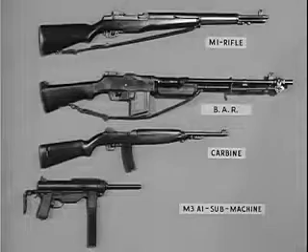The M14 rifle will, in time, replace these four weapons. The adoption of the M14, one basic weapon, greatly reduces logistical problems. Moreover, it reduces time for training the user and small arms maintenance personnel.

The new weapon has a 20-round magazine which is quickly and easily replaced. Before removing an empty magazine, the safety is placed on safe. The empty magazine is removed and a loaded magazine is snapped into place so that it is engaged by the rear of the operating rod spring guide and the magazine latch. Now allow the operating rod spring to force the operating rod forward, carrying the bolt with it, to chamber the first round and lock the bolt. The rifle is now cocked and ready to fire when the safety is off.

The magazine also can be replenished from the top with clips of 5 rounds each without removing the magazine from the weapon.

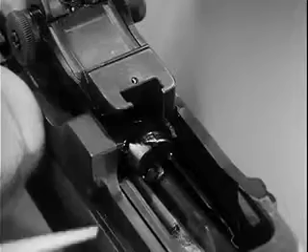To speed up the loading operation for continued firing, the bolt is held to the rear automatically for reloading after the last round in the magazine is fired. This is accomplished by the upward pressure of the magazine follower, forcing the bolt lock into position in front of the bolt. This holds the bolt to the rear while the change of magazine takes place.

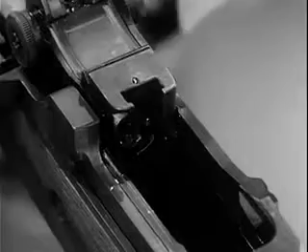By pulling slightly to the rear on the operating rod, the rifleman allows the bolt lock spring to expand, pivoting the bolt lock out from in front of the bolt. This also releases the operating rod. As the operating rod is released, it is driven forward by the expanding operating rod spring, taking the bolt with it. The bolt strips the first round from the magazine for chambering.

Another feature of the M14 is its flash suppressor. Slots in the suppressor act to break up the escaping gases, thus reducing the flash. The suppressor also acts as a muzzle brake, minimizing recoil and giving maximum stability during firing.

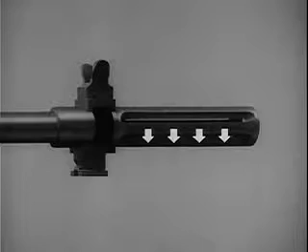This is the way the flash suppressor works. Gas strikes the wide bottom rib of the flash suppressor and exerts downward pressure to keep the rifle stable during firing. Of course, gas escapes in all other directions too.

When the propellant gas hits the front of the slots, it tends to pull the weapon forward, reducing recoil.

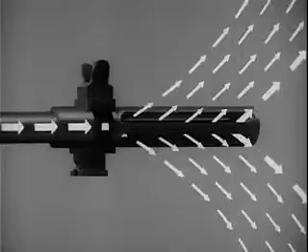By disassembling or field stripping the weapon, you will become familiar with the parts. To field strip it, first clear the weapon. That is, remove the magazine and check to see there is no round in the chamber.

Put the safety in the safe position. Turn the rifle upside down with the muzzle pointing to your left. To remove the firing mechanism, grasp the rear of the trigger guard and pull to your right and pry upward.

Then swing up the trigger guard and lift out the firing mechanism. Separate the stock from the receiver by placing your left hand on the gas cylinder and lifting upward on the butt of the stock.

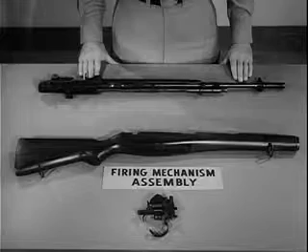The rifle is now field stripped into its three basic groups: the firing mechanism assembly, the stock group, and the barrel and receiver group.

To further disassemble the weapon into individual parts, turn the barrel and receiver group on its side with the connector assembly up.

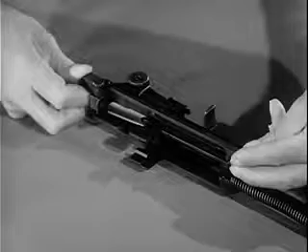To release the connector assembly, press forward on it with the right thumb until the forward end can be lifted off the connector lock. Rotate the connector assembly clockwise until the slot at the rear end is aligned with the elongated stud on the sear release.

Then slightly lower the front end of the connector and lift it from the sear release.

To remove the operating rod spring and spring guide, pull forward on the operating rod spring, relieving pressure on the connector lock. Pull the lock outward, then remove the operating rod spring and spring guide.

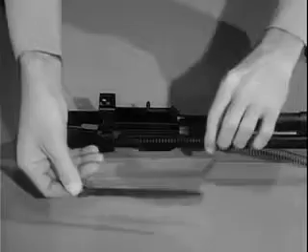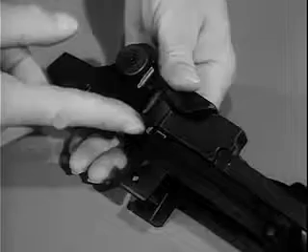Now turn the barrel and receiver group so the sights are down. Retract the operating rod until the guide lug on its lower surface aligns with the disassembly notch on the receiver. Lift the operating rod out and to the rear, disengaging it from the operating rod guide.

To remove the bolt group, grasp it by the roller, and while sliding it forward, lift it upward and outward to the right front with a slight rotating motion.

The barrel and receiver group is now field stripped into the connector assembly, the operating rod spring and guide, the operating rod, and the bolt. These basic groups may be further disassembled if required.

The rifle is assembled by reversing the procedure. After reassembly, the rifle should be hand-operated without ammunition to check for freedom of action of the components.

The M14 is gas-operated. That is, some of the gas formed by the firing of the cartridge is bled to the gas cylinder.

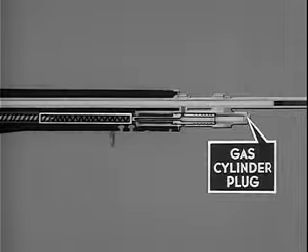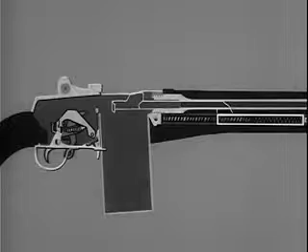In the gas cylinder, the gas inside the piston expands. The piston drives the operating rod to the rear, compressing the operating rod spring. Then the compressed operating rod spring expands, driving the operating rod to its forward position.

This combination of backward and forward movements initiated by the firing of each cartridge performs a series of steps known as the cycle of functioning. The cycle of functioning can be broken down into 8 steps. Of course, these are performed as integrated and overlapping actions.

The first step is feeding, which is positioning the cartridge ready for chambering. The second step is chambering, seating the round in the chamber. Third step is locking the bolt to the barrel, thus holding the cartridge seated in the chamber so that gas pressure will be maintained in the barrel to propel the bullet. The fourth step is firing, ignition of the primer of the cartridge in the chamber.

Step 5 is unlocking the bolt from the barrel. Step 6 is extraction of the empty cartridge case from the chamber. In step 7, the empty cartridge case is ejected from the weapon. And step 8 is cocking in preparation for the firing of the next round.

These 8 steps happen one after another, and so rapidly as to be almost simultaneous. By using a schematic drawing, we will see how these 8 steps are performed.

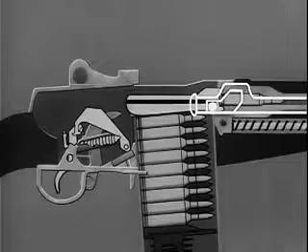The bolt is locked. The rifle is now cocked and ready to be fired when the safety is off. By pressing the trigger, the hammer is released, firing the cartridge.

Part of the propelling gas escapes to the gas cylinder. The expanding gas in the gas cylinder drives the piston and operating rod to the rear and the bolt with it. On this rear movement, the bolt is unlocked.

The spent cartridge is extracted from the chamber and ejected from the rifle. At the same time, the hammer is again cocked and the cycle ready to start over.

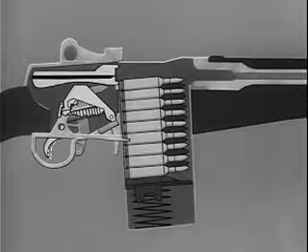Now, let us see in greater detail how the 8 functions or steps are performed.

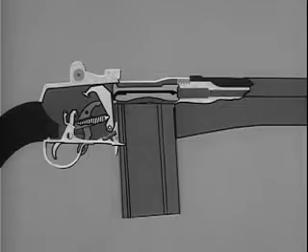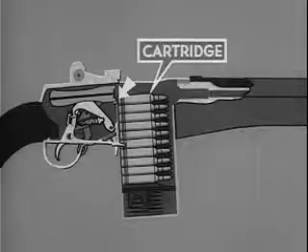When we move the bolt to the rear, by hand initially, the bolt clears the top cartridge in the magazine. The magazine spring, exerting pressure against the follower, forces the top cartridge up in front of the bolt in position for chambering. Let us look at it again.

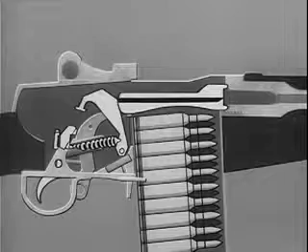When the bolt is moved to the rear, the bolt rotates. Rotation of the bolt during unlocking cams the hammer slightly rearward. It also moves the firing pin rearward as the firing pin tang contacts the camming surface on the bridge of the receiver.

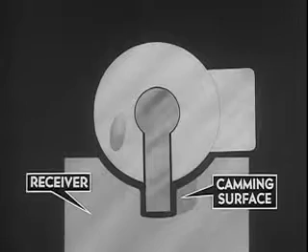As the bolt continues to the rear, the feed rib on the bottom of the bolt forces the hammer to the rear and down, pivoting the hammer on the hammer pin. The bolt continues rearward, riding over the hammer.

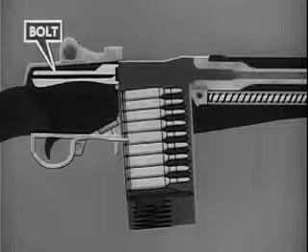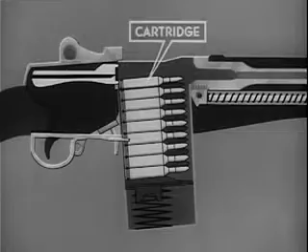The bolt is now driven forward by the expansion of the compressed operating rod spring. The bolt strips the topmost cartridge from the magazine. The cartridge is deflected upward by the feed ramp in the lower rear of the chamber and forced into the chamber.

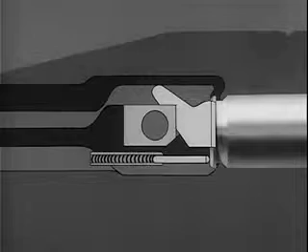Also, on the forward movement of the bolt, the extractor on the bolt face is forced outward by the rim of the cartridge. When the face of the bolt comes against the head of the cartridge, the extractor spring expands, and the lip of the extractor engages the extracting groove of the cartridge.

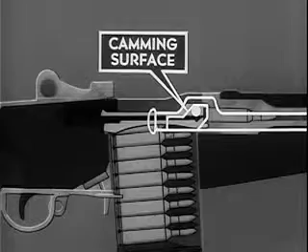Finally, the bolt is locked. Locking of the bolt is accomplished by the rear of the camming surface in the hump of the operating rod. The camming surface contacts the anti-friction roller on the locking lug and rotates the bolt clockwise. By the clockwise rotation, the locking lugs on the bolt are forced into the locking recess of the receiver. Meanwhile, the firing pin tang is aligned with the notch in the bridge of the receiver.

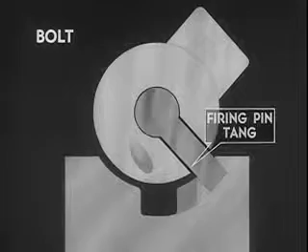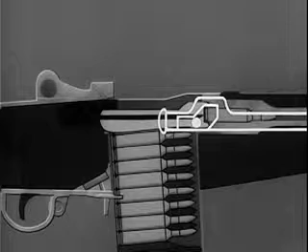The operating rod continues its forward movement for 3/8 of an inch. During chambering and locking, the operating rod is repositioning the gas piston.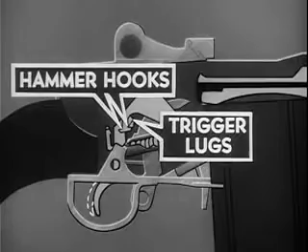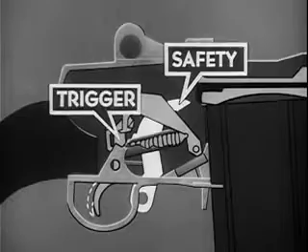With the first round chambered and locked, the next step is firing. Firing, of course, is initiated in the firing mechanism assembly. The firing mechanism assembly consists of the hammer, the hammer spring, which drives the hammer and which is compressed when the hammer is cocked, the hammer hooks, which are held by the trigger lugs, the safety, which engages the hammer and blocks movement of the trigger when in the rear safe position, and the sear.

The movement of the bolt to the rear forced the rear hammer hooks into engagement with the sear, which prevents the hammer from following the bolt forward. When the trigger is released, the front hammer hook will be engaged by the trigger lugs as soon as the sear releases the rear hammer hooks. When the trigger is squeezed, the trigger lugs release the hammer hooks so that the hammer spring can drive the hammer forward.

The hammer strikes the tang of the firing pin and moves it forward. The firing pin strikes the primer on the base of the cartridge, igniting the powder.

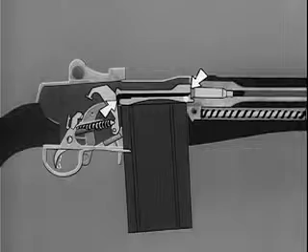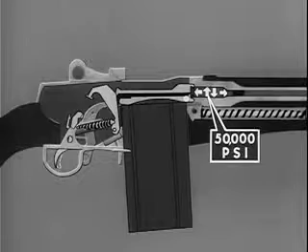When the cartridge is fired in the chamber, gas pressures build up, and a gas pressure of 50,000 pounds per square inch is exerted in every direction. It cannot escape to the rear because the locked bolt holds the case in the chamber, and the brass case is expanded against the chamber walls, effectively sealing the chamber. The gas can only escape by propelling the bullet out through the muzzle of the rifle.

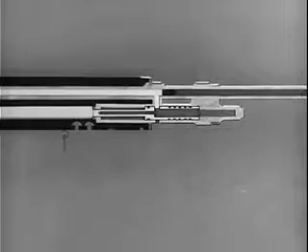Near the muzzle is the gas port in the barrel, and as the bullet clears the gas port, part of the gas is bled off, entering the gas cylinder and piston. As gas enters the piston, it expands into the gas cylinder plug.

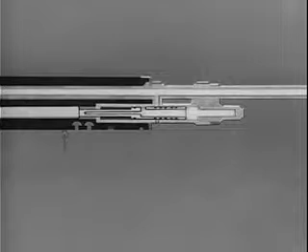Continued expansion of gas builds up a pressure which forces the gas piston to the rear. The initial rearward movement of the piston shuts off the barrel gas port. The pressure exerted against the piston drives it to the rear 1 1/2 inches.

As the piston clears the lower gas port in the gas cylinder, the gas pressure instantly vents to the open air, removing all driving force from the piston.

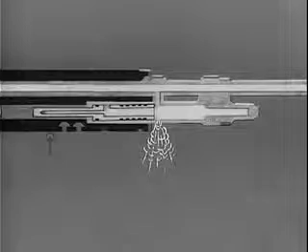During the 1 1/2 inch movement of the piston rearward, the piston is forcing the operating rod to the rear. After completion of piston travel, the force of inertia causes the operating rod to continue to the rear until the termination of recoil. Recoil ends when the shoulder of the operating rod contacts the front end of the receiver.

The operating rod spring now expands and forces the operating rod forward in preparation for firing of the next round. In the forward movement, the front end of the operating rod repositions the gas piston, which comes to rest against the gas cylinder plug. To see how unlocking was accomplished, we will repeat the action.

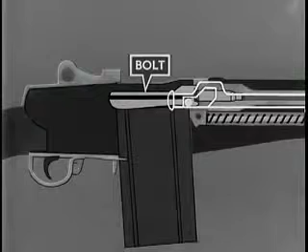When the operating rod moved rearward, it accomplished several things, the first of which was the unlocking of the bolt. Before the bolt starts to unlock, the operating rod permits 3/8 of an inch of free travel to the rear. This is a safety factor, permitting the bullet to leave the muzzle and gas pressure to subside before unlocking begins. This prevents gas from blowing back into the rifleman's face when the bolt unlocks.

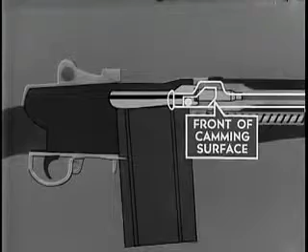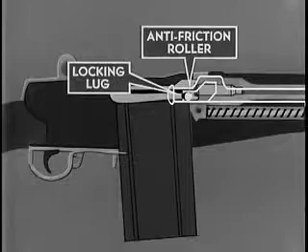At the completion of free travel, the front of the camming surface in the hump of the operating rod comes in contact with the anti-friction roller on the right locking lug. This rotates the bolt counterclockwise, forcing the locking lug on the bolt out of the locking recess in the receiver and unlocking the bolt.

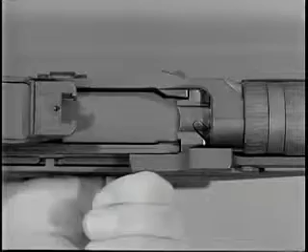While the bolt is being unlocked, slow initial extraction takes place. The rim of the cartridge case is gripped firmly by the extractor. A slow twisting pull called slow initial extraction is imparted by the rotating bolt.

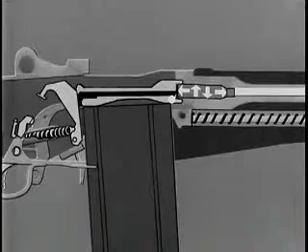Remember that at the moment the cartridge was fired, gas pressure of 50,000 pounds per square inch expanded the brass cartridge case tight against the chamber walls. It also forced the head of the cartridge case against the face of the bolt.

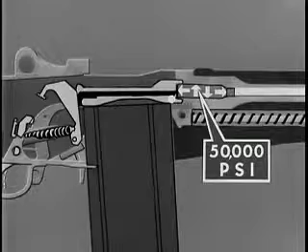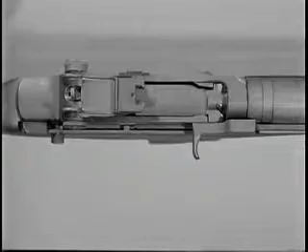To pry the cartridge loose, the slow twisting pull is required. It begins just before unlocking is completed. The corresponding radii of the locking lugs on the bolt and the locking recesses of the receiver, along with the rotation of the bolt, allow a slight rearward movement of the bolt. This rearward twisting action loosens the case in the chamber and causes slow initial extraction. When the bolt continues to the rear, following unlocking and extraction, the spent cartridge is ejected.

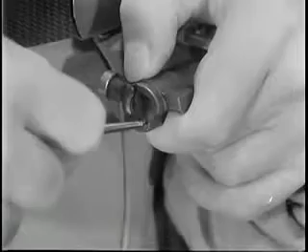This is the ejector in the face of the bolt. The ejector spring is compressed when the ejector is held flush against the face of the bolt. When a round is in the chamber and the bolt is locked, the head of the cartridge compresses the ejector spring.

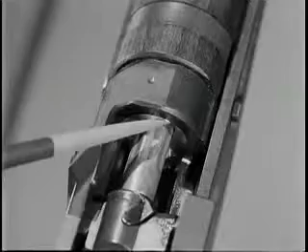During extraction, the chamber wall holds the neck of the expended cartridge case in line with the bore. But when the neck of the cartridge case clears the chamber, the ejector spring is allowed to expand. The ejector forces the empty cartridge case to pivot about the extractor, ejecting it from the rifle.

After the spent cartridge is ejected, the bolt continues to the rear over the rounds in the magazine. The rounds are under pressure by the follower.

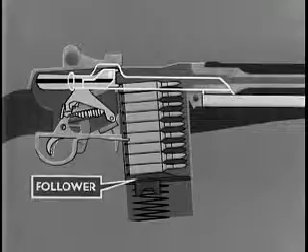When the bolt begins its forward movement, the hammer is cocked and the cycle is then repeated: feeding, chambering, locking, firing, unlocking, extracting, ejecting, and cocking.

The cycle of functioning we have demonstrated is the same whether firing is semi-automatic or full automatic. In semi-automatic fire, the trigger must be released each time before another round can be fired. In full automatic fire, cartridges are fired continuously as long as the trigger is held to the rear.

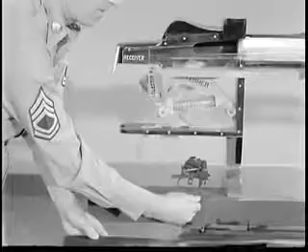Let's see how the mechanism of the rifle can be adjusted to fire either single shots or bursts. To see how the firing mechanism operates, we will use an oversized model. If the firing mechanism assembly were operating at normal speed, recoil would happen so fast that no rifleman firing single shots would have time to release the trigger in preparation for the next single shot.

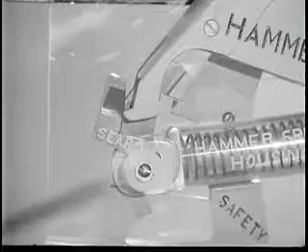To overcome that, the sear is provided. The sear catches the hammer hooks even though the trigger is still being squeezed. When the trigger is released, the rear hammer hooks are released from the sear, and the front hammer hooks are engaged by the trigger lugs. The weapon is now cocked and ready to fire again when the trigger is squeezed.

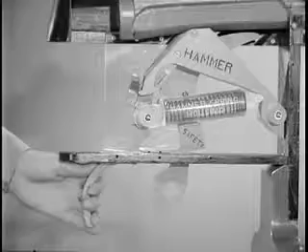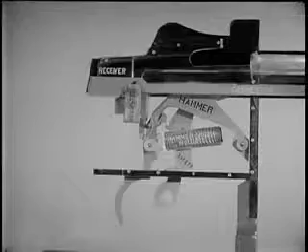To achieve full automatic fire, there must be some way to trip the sear after the bolt is fully locked, while the trigger is being held back. This is done by the selector, the sear release, and the connector assembly. The selector sets the mechanism for either semi-automatic or full automatic fire. When the selector is set in the full automatic position, the connector forces the sear release to trip the sear.

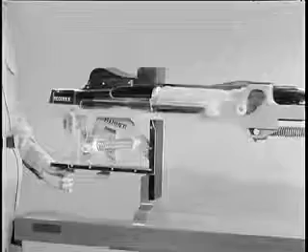In the last 1/8 of an inch of forward movement of the operating rod, the rifle will continue to fire automatically as long as the rifleman holds the trigger to the rear. When the trigger is released, the front hammer hooks are engaged by the trigger lugs on the next rearward movement of the hammer, and the weapon ceases firing.

M14 rifles equipped for full automatic fire have a selector marked A. To fire full automatic, the rifleman turns the selector so that the letter A faces him. By pressing in on the selector and giving it half a turn so that the letter A is away from him, he sets it for semi-automatic fire.

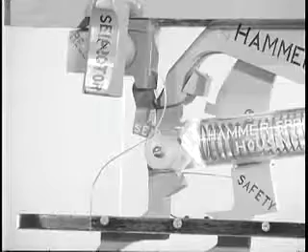When turning the selector to semi-automatic, the movement of the selector rotates the sear release forward on an eccentric shaft approximately 1/8 of an inch, so that it cannot trip the sear. It causes the connector assembly to move far enough forward so there is no contact between the operating rod and the hook of the connector assembly. This positions the sear release so it cannot contact the sear.

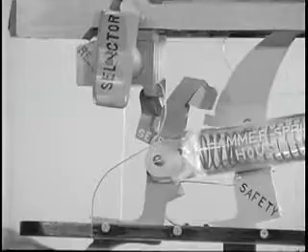At the discretion of the unit commander, the M14 rifle may be issued to troops either with the selector or with a selector lock like this one, which permits only semi-automatic fire.

In summary, the M14 rifle fires the standard NATO 7.62 millimeter ammunition for small arms. It fires semi-automatic, one shot each time the trigger is squeezed. And it can also be set to fire full automatic, that is, delivering continuous fire as long as the trigger is held back and there are rounds in the magazine.